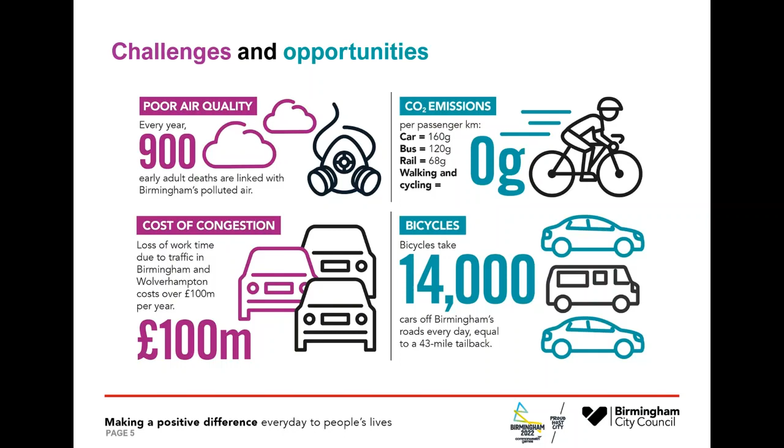And finally, the sort of cycle infrastructure that we're talking about today - there's only one stretch that isn't in this proposal - is segregated infrastructure. So it's separate from pedestrians and from general traffic, so that the cyclists have that clear space to use.

And the reason we want to do that is we know from the Bike Life reports, which is a piece of research that Sustrans do every couple of years, that 76% of West Midlands residents think that more cycle tracks along the roads, which are physically separate from traffic and pedestrians, would help them to cycle more. And 65% of West Midlands residents support building more of that kind of segregated cycle track, even if that means less room for other traffic.

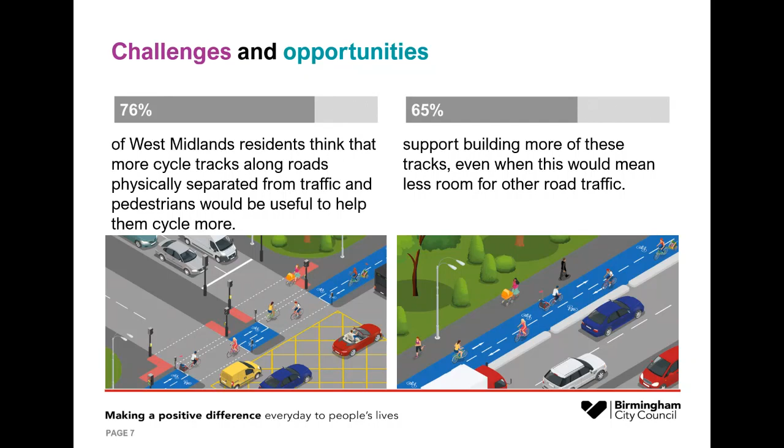So that for us was a clear message that this is the sort of infrastructure that people who are maybe cyclists but haven't quite started yet - that's what might get them to feel able to start cycling in Birmingham.

The section of route that we're consulting on in this consultation runs from the Cannon Hill Park entrance, which is the pedestrian and cycle entrance opposite Cannon Hill Road I think it's called, running down Edgbaston Road, along Park Hill, which is a fairly quiet road already, and then down Chantry Road. There's a school on the corner of Chantry Road as well there, which means we might get some good links for children to be able to cycle to school. Along Chantry Road down to the A435 in Moseley.

At the same time, we've got this spur coming off on Salisbury Road, because what we're proposing to do there is to reduce the speed of Salisbury Road to a 20 miles per hour limit, so that those cyclists who feel more comfortable sharing with general traffic have a better environment for that, because the traffic is slowed overall. That's also - we've had some looking at the statistics for accidents that happen on Salisbury Road. We think that there'll be a general road safety benefit for all road users there by reducing the speed limit.

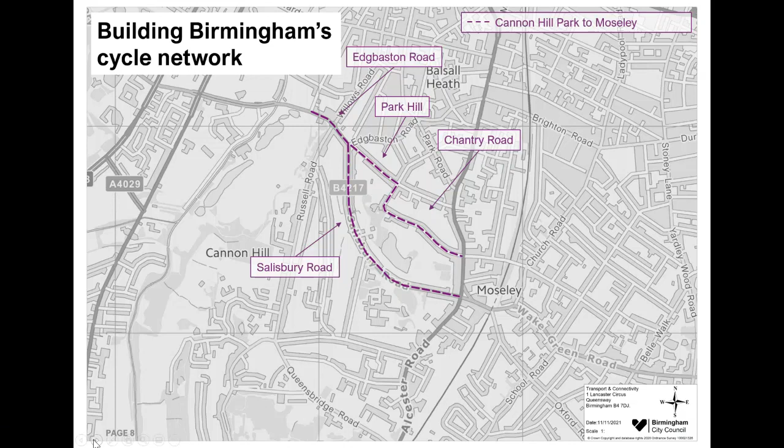At the same time, we're doing a scheme which puts in more segregated cycle route along Edgbaston Road, and that early section of Priory Road, joining the route we're talking about today up to the A38 blue route on the Bristol Road. That scheme is literally being built as we speak - construction began this week, starting with the site compound, and it's due to be completed next summer.

At the other end, we've recently concluded our consultation on the next phase of the Places for People in Kings Heath and Moseley scheme. That's about an area-wide treatment in Kings Heath and Moseley, looking to reduce the dominance of cars on residential streets, so the only cars there are ones actually visiting. Keeping the area open for walking and cycling makes it a more pleasant environment to cycle in, even without specific cycling infrastructure, just from quieter streets and fewer cars.

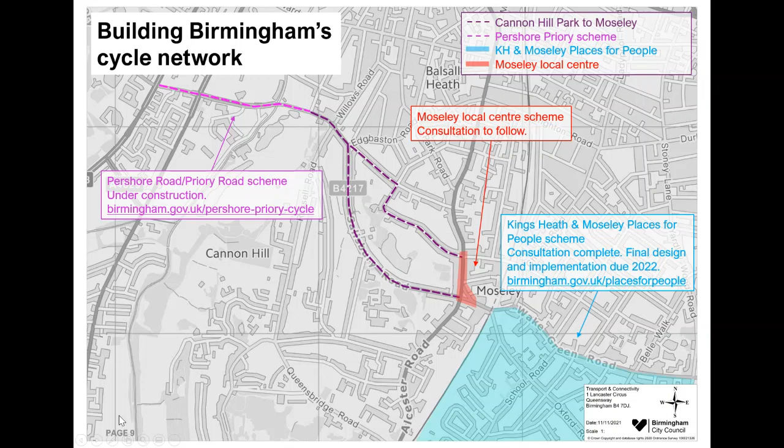That bit on Pershore Road is a bit of shared footway, but again it links in with that section. And then we have a current link through to the Rea Valley route from Moseley - that's just on 20-mile-per-hour streets, so no specific infrastructure there, but it shows how that links up.

Finally, what I'm adding in here is our walking and cycling improvement plan - our map of all the places we'd like to build cycle routes as and when we can afford it. All those dotted lines are routes we'd like to put in the future. I think I've just realised we have put in that one on Pebble Mill Road - I should have turned that solid because I think we've since built that.

But these dotted lines link us up through into Balsall Heath and continue to create the network. What I'd say is this route we're talking about tonight is a really great piece in the puzzle that fills it in and makes sense to be able to link Moseley through to that blue route on the A38.

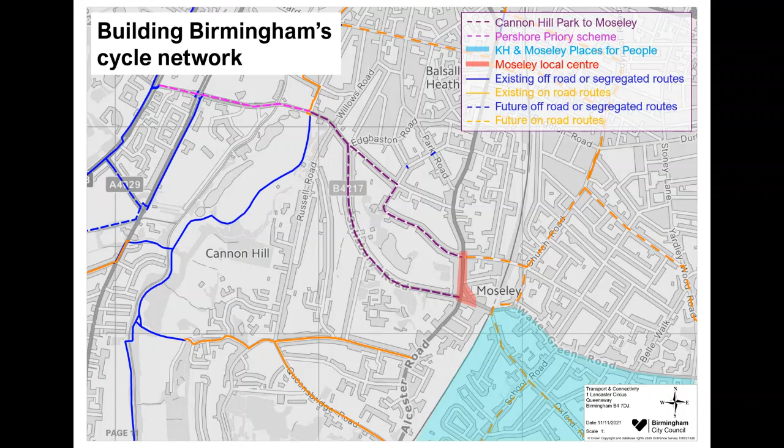Thanks, Alex. Hi all, my name's Alex Kernan and I'll be talking through the proposals, as Rebecca says. I'm just going to share my screen now so you can all see the plans. Okay, so hopefully you can all see this now on my screen.

So obviously Rebecca's talked through the plans that tie into our scheme. I'm going to start at the end of the route where we connect onto the Pershore Road scheme, which is currently being constructed on site and, as Rebecca said, started this week, so we should start seeing some movement on this. It'd be nice to tie into the route to create a clear link between Priory Road all the way through to Moseley, providing better connectivity into the city.

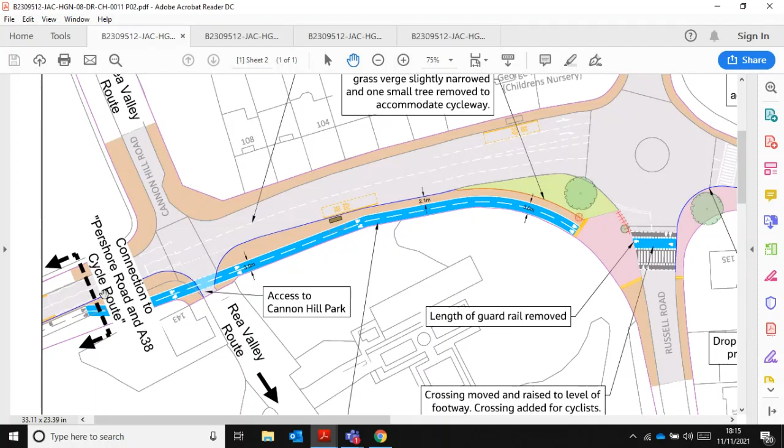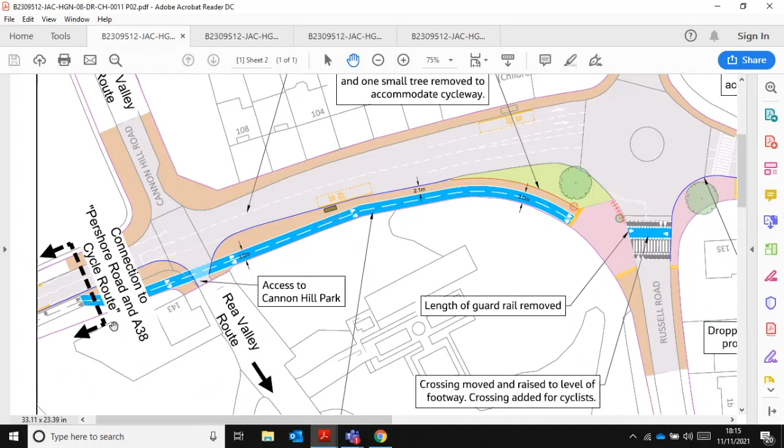Looking at the plans here, what we're planning to do is propose a segregated route almost all the way from Priory Road, the Edgbaston Road, all the way towards Moseley. It's shown in blue at the moment, but that's just for indicative purposes, so you can clearly see where the cycle track's being proposed.

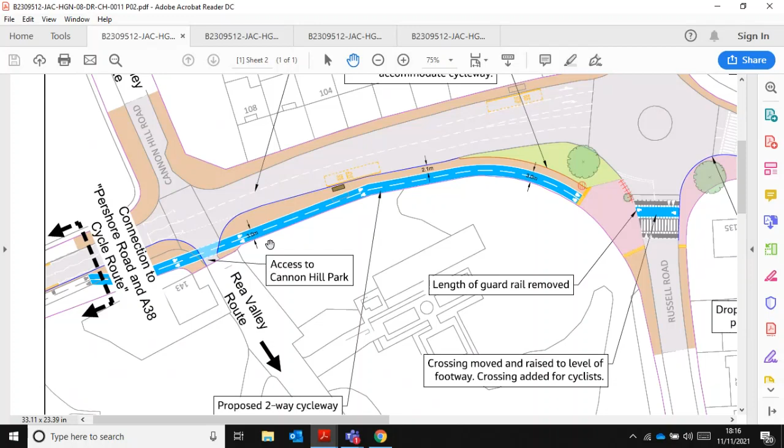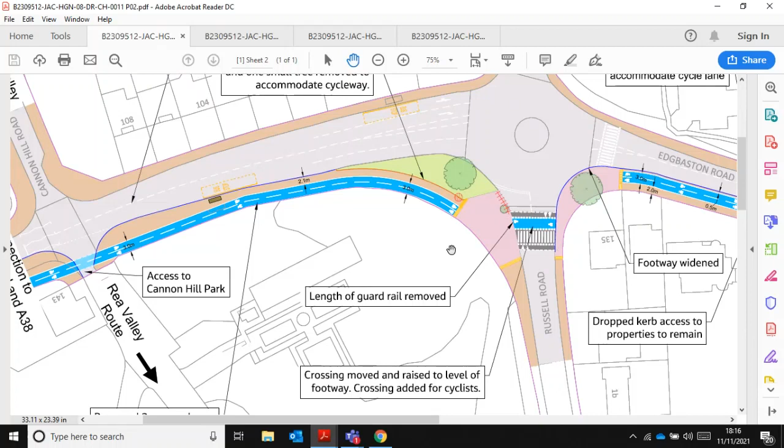We're only planning to do blue where we've got points of interest where vehicles will need to be more aware that there's cycling facilities across junctions and crossings, just to highlight an additional hazard or crossing point, just so it makes it clear for vehicles.

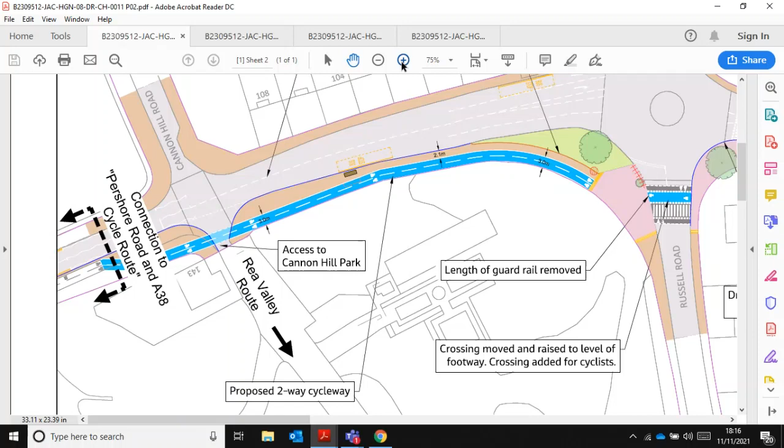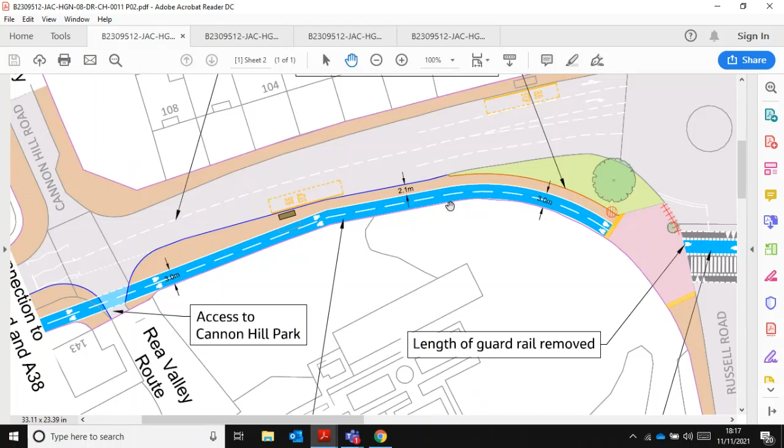So just starting at the end here, as you can see, our cycle route is proposing to tie in with the end of the Pershore Road route with the segregated two-way cycle track, which crosses over from the park, the Cannon Hill Park access. This will be at pavement level, so level with the footway. We are planning to build out the kerb line slightly just to accommodate the cycle route and also pedestrian facilities in the area, so you've still got footway space.

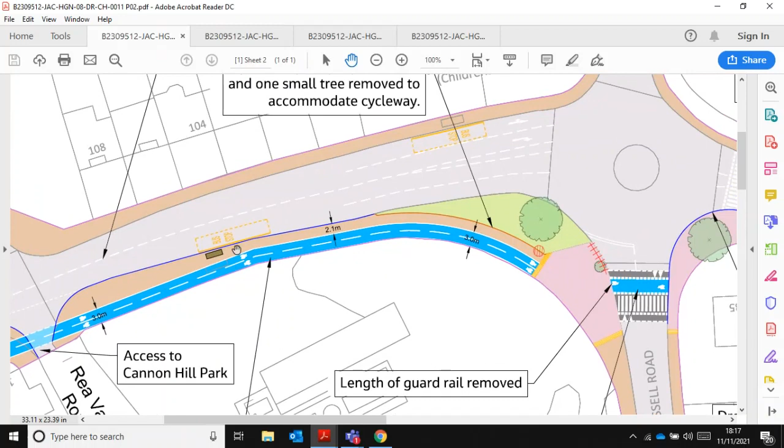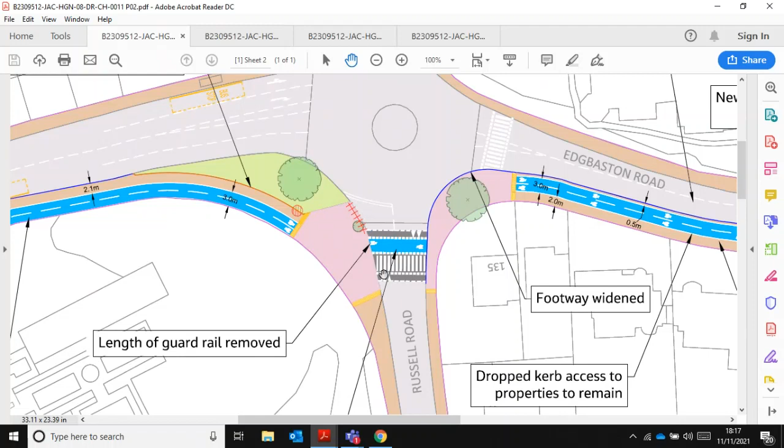We've kept the bus stop away from the cycle route completely at this point, so there will still be room for passengers to queue and alight on the bus stop. So just moving round, we've got a continuous stretch of the segregated cycle route. We then come into an area of shared use where pedestrians and cyclists can use this area here, just because it's particularly wider and there's a lot of visibility around here.

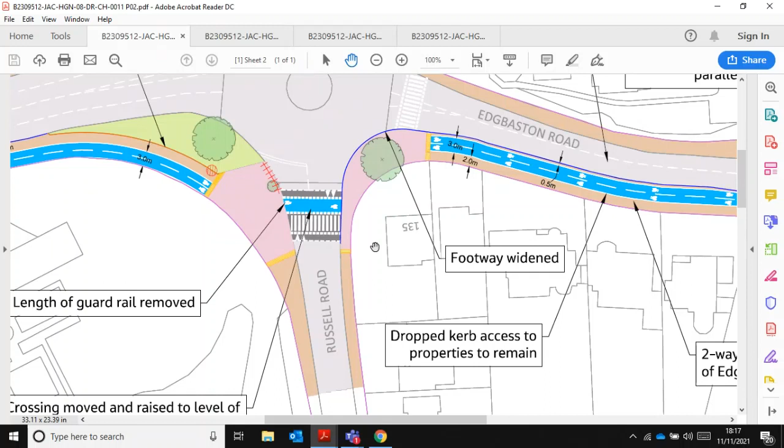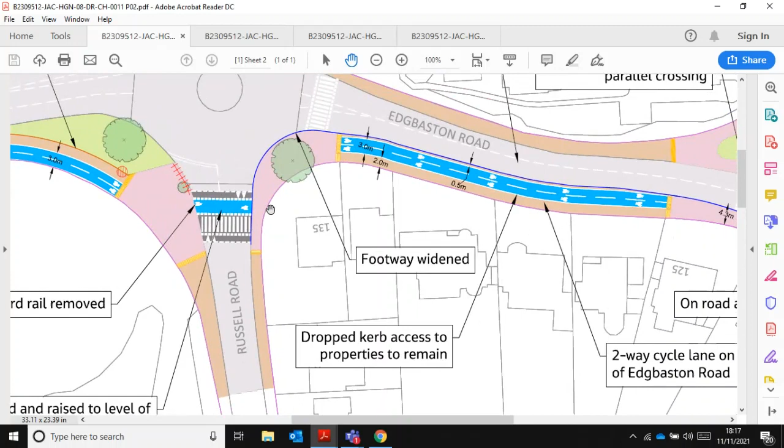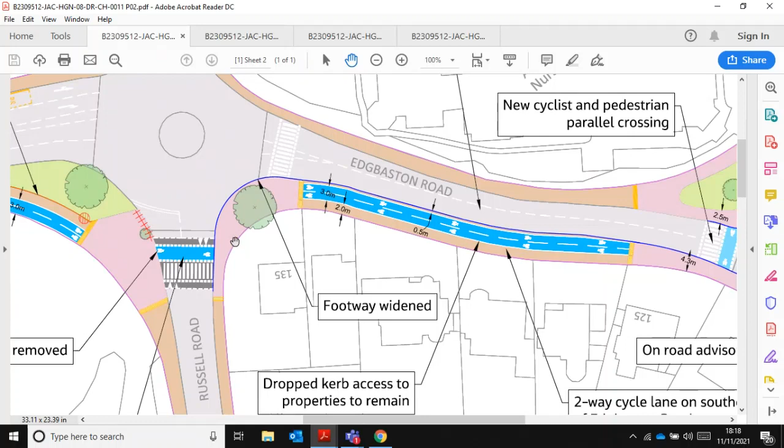We've then got a tiger crossing proposed across Russell Road for cyclists and pedestrians, so they will be able to cross the road here and have priority. We're then proposing to extend out the footway again on this corner, just to create a little bit of extra space here for pedestrians and cyclists again, so that just gives a little bit more room and visibility for everybody.

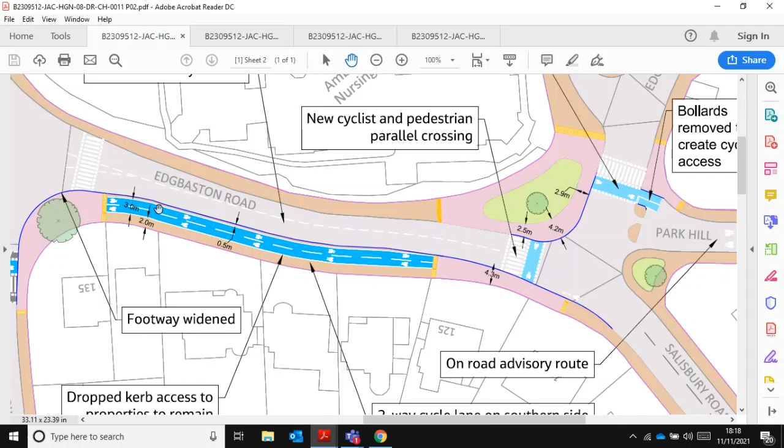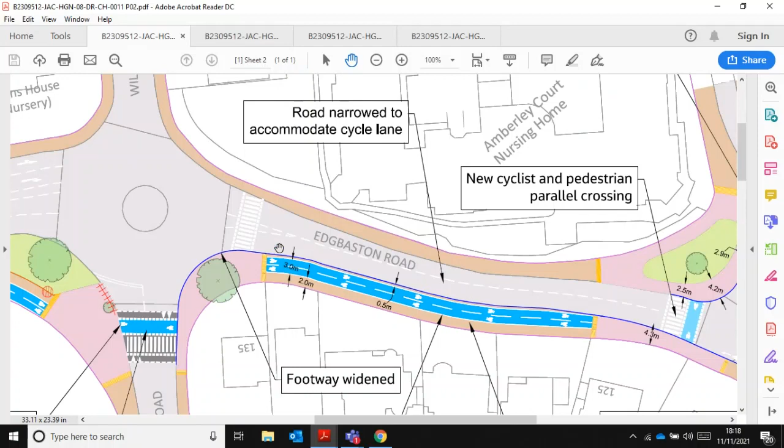So continuing on Edgbaston Road, at this point we then come into another area of segregated cycle route in both directions, and there will still be the permitted footway space as it is currently. What we will do is we will narrow down the road at this point, just because we need that extra bit of space for the cycle track. So this stretch of road will actually just be for cars going in one direction, so we won't have two lanes as we approach the roundabout at the top here, as it is currently, because we're building out the footway along this section.

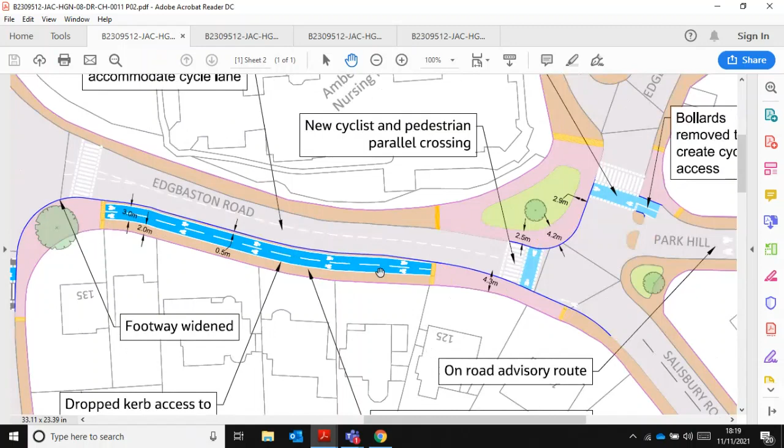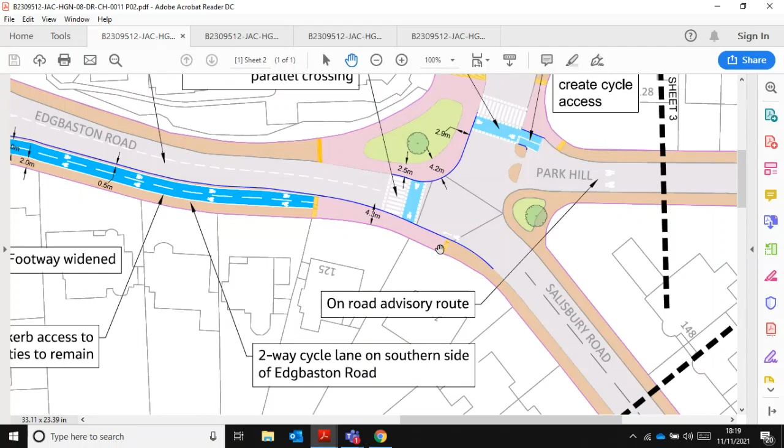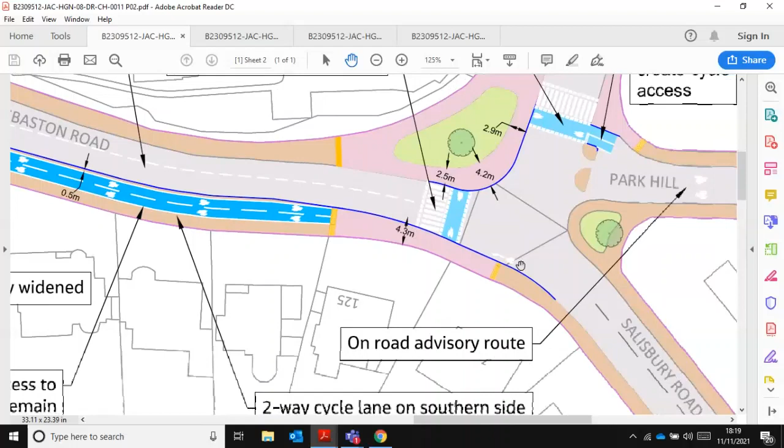At the end of this section, we then come into another shared area where we've got pedestrians and cyclists, just for a short section. If you are a cyclist that uses Salisbury Road, there is a provision where you can actually rejoin the footway where it's shared space, so you can access and egress from the cycle route.

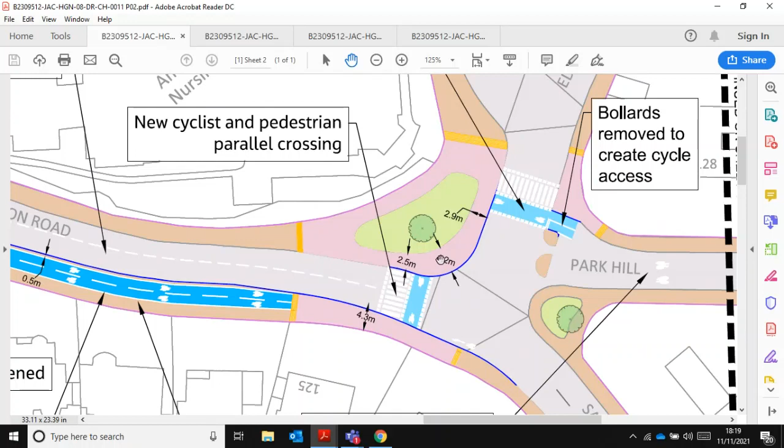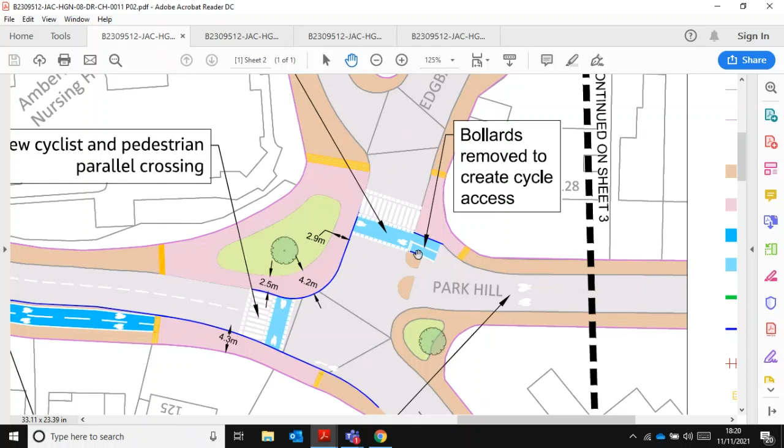We've then got another tiger crossing just to get cyclists across to the opposite side, a little bit of footway extension for some shared use along here, and then another tiger crossing to get cyclists onto Park Hill for the advisory route. So obviously there's an existing modal filter, so bollards and a kerbed build out here. What we would be proposing to do is just make some adjustments to the existing build outs there, so that cyclists can easily access and egress along Park Hill. So that's that part of the plan.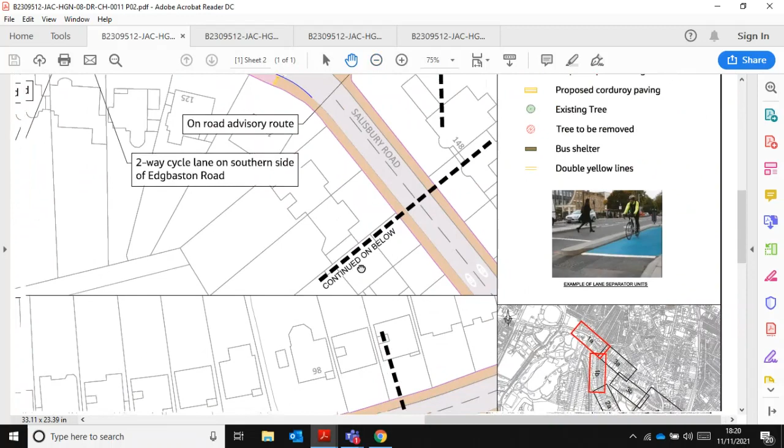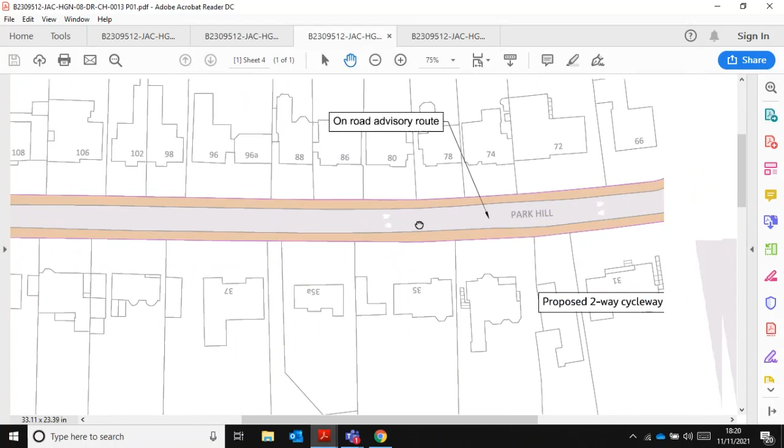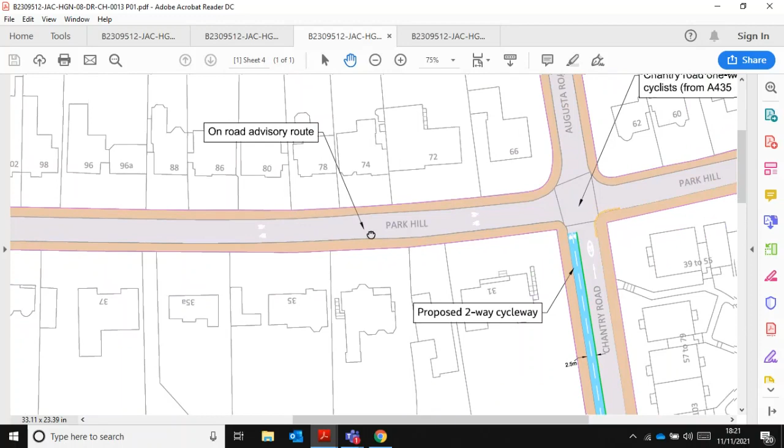Just scroll down. I'm showing Salisbury. So I'll just continue on the Park Hill section. So going back onto Park Hill, we are continuing the advisory cycle route along Park Hill. So that will just be on the carriageway or road level. There won't be any segregation here, just because it's quite a quiet road through this section, so we feel that that's adequate along this section.

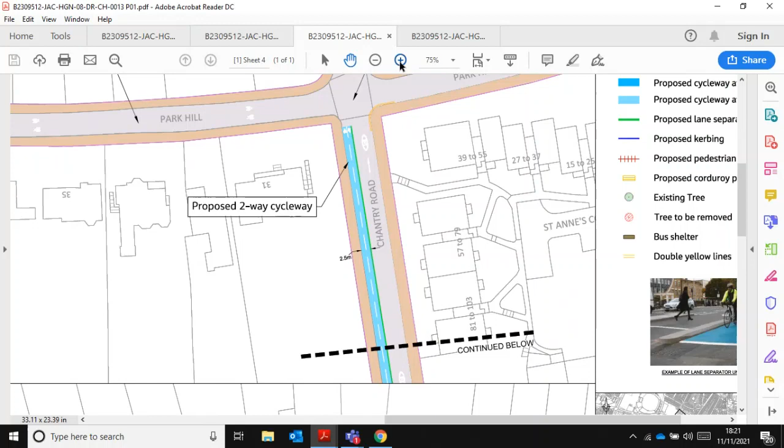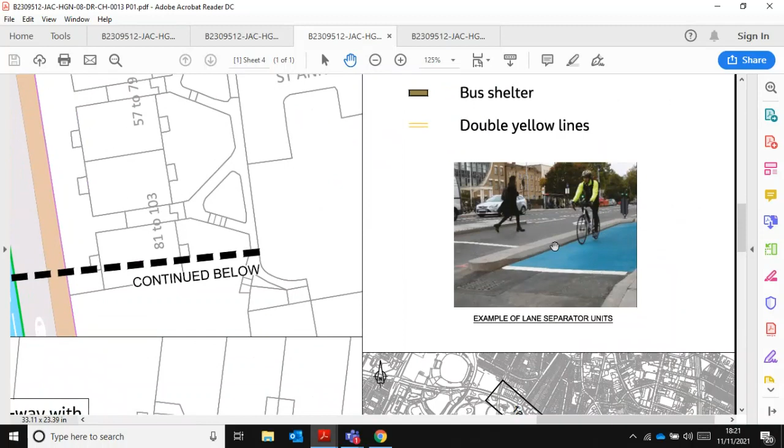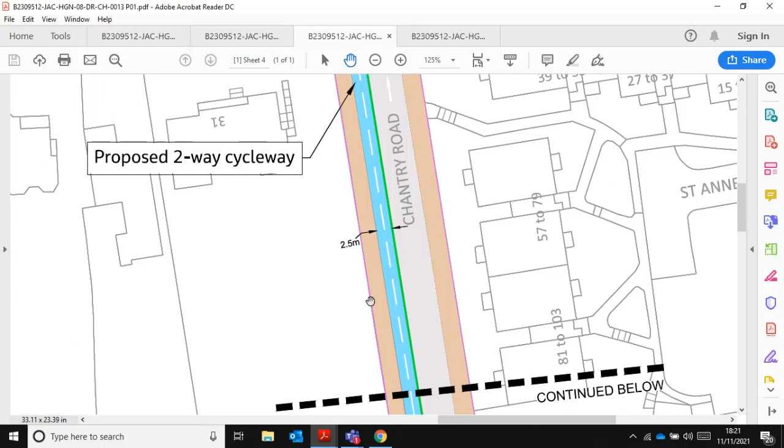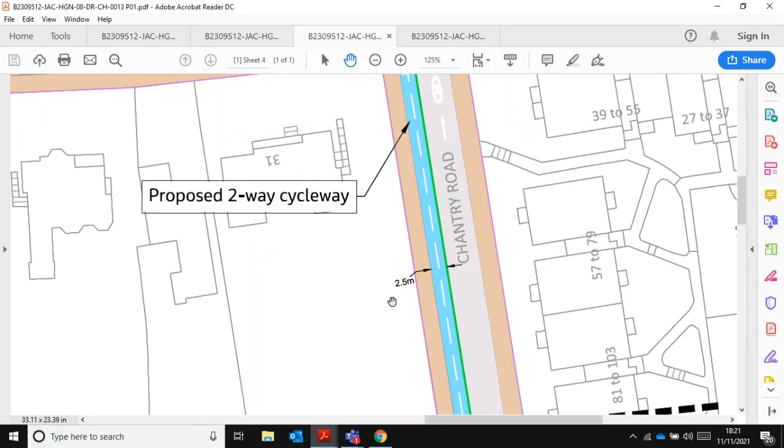We then come towards the junction of Chantry Road, where we're planning to introduce a segregated cycle lane in both directions, and that's separated by a solid curb, which I will show you an example of here. So as you can see, just a little photo there of the solid curb. So that's going to be along the length of Chantry Road. The thing to bear in mind here is that obviously there are accesses to properties along this route, which will be accommodated, so there will be gaps in the curbs to allow residents to access and egress their properties, so that will not be an issue.

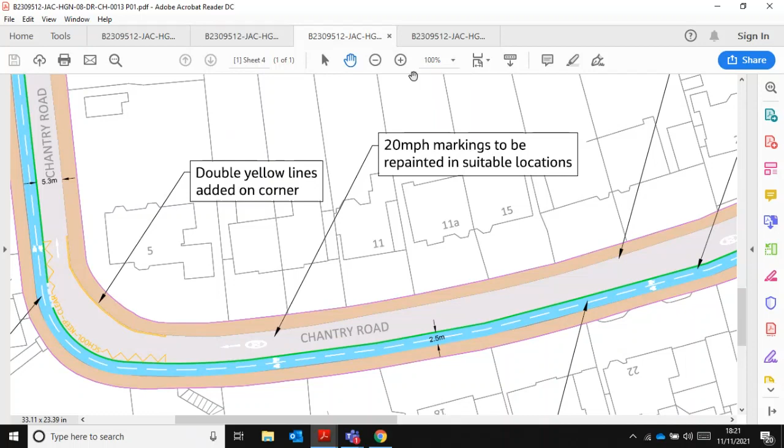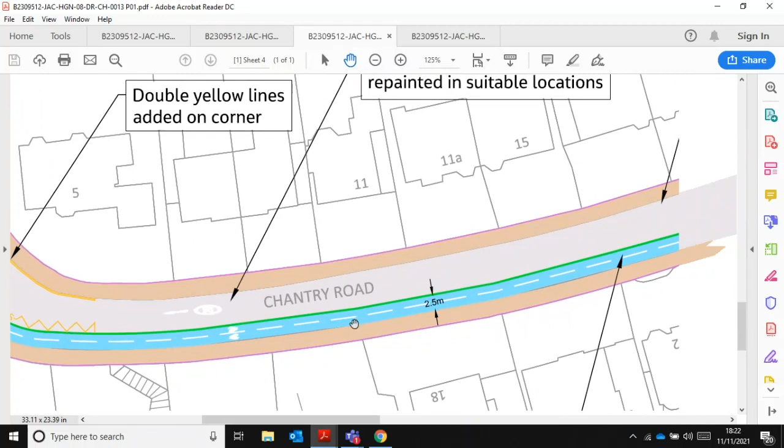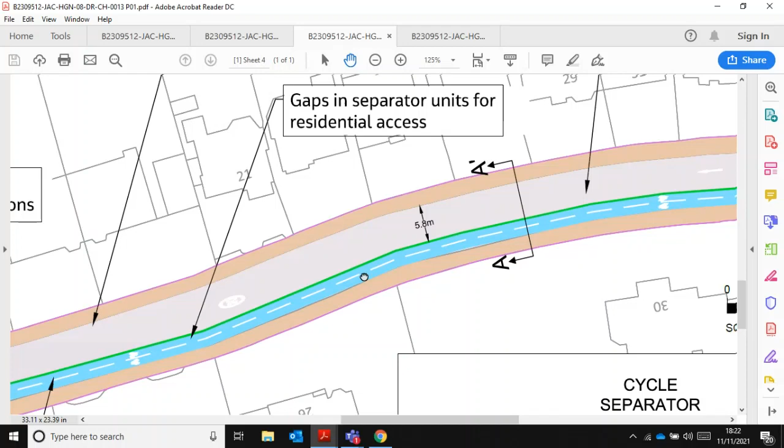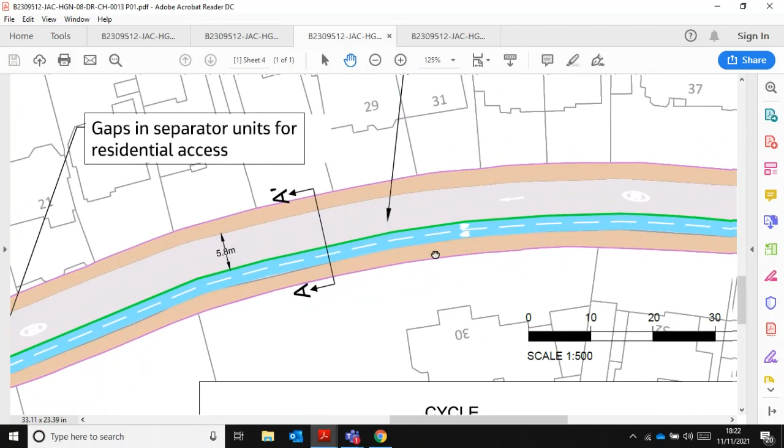So Chantry Road as a whole will become one way as opposed to a two-way route, as shown on the image below. And obviously there's a segregated bidirectional or two-way cycle track the whole way through. Again, as I say, it was shown in blue, but this is just for illustrative purposes only. So the route will just be white lined and segregated with a curb, as I say, with gaps to allow accesses. And that follows the whole route down all the way into Moseley High Street.

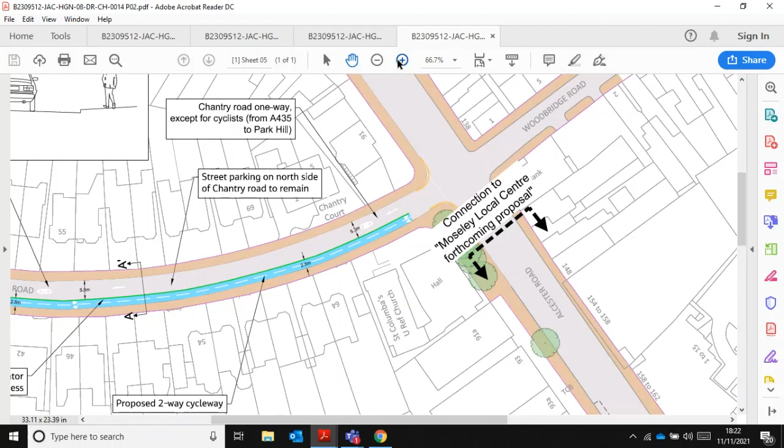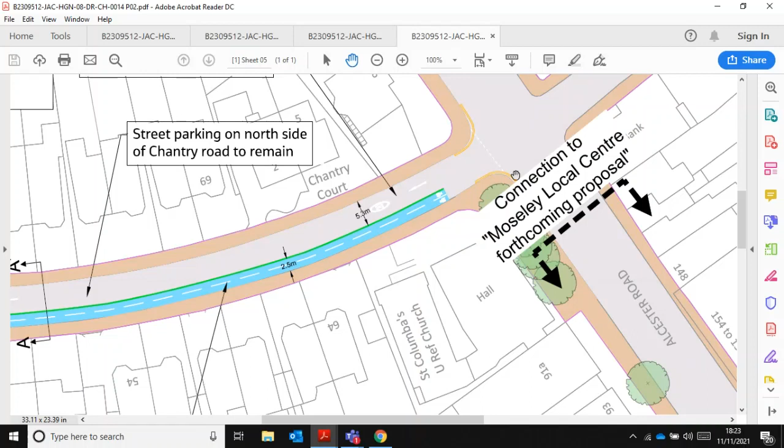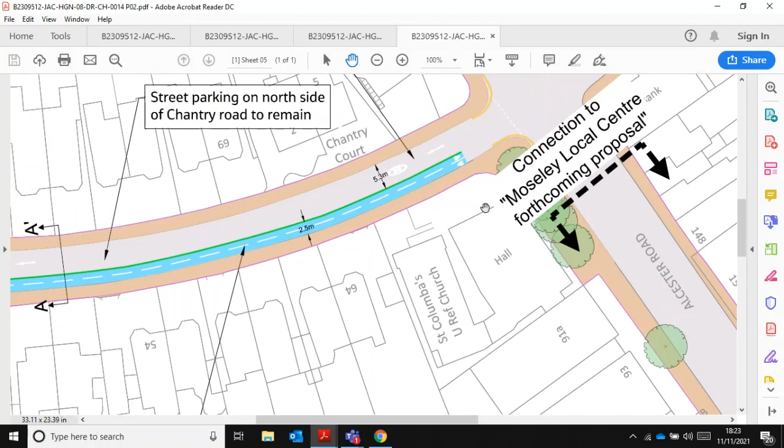So it ties in just at the end at the junction of Alcester Road here. So the proposal on this corner here, where the two-way cycle track ends and you can access Moseley, will be picked up as part of the Moseley Local Centre Plan. At the moment, we're looking at allowing cyclists to access an area of shared use at the very end of Chantry Road, and then there would possibly be a cycle route on one of the sides of the road, but we're still in discussion on the details of that proposal, but it will be coming forward for a consultation soon.

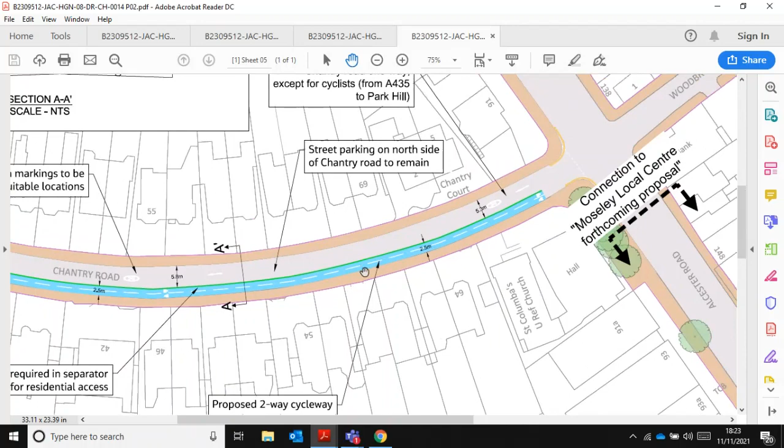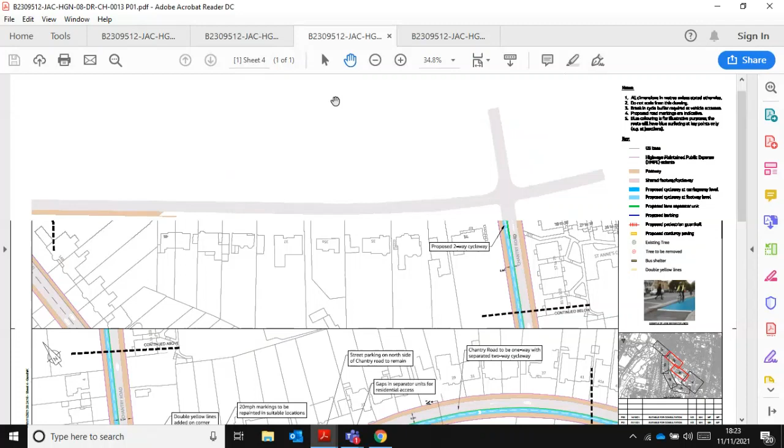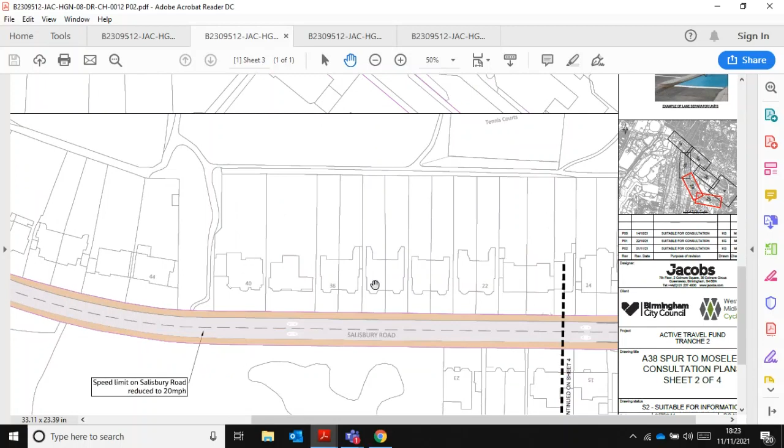Okay, and then just looking at Salisbury Road. Sorry, just flipping back on the plans. There we go. So Salisbury Road, we've proposed a 20-mile-an-hour speed limit on Salisbury Road, all the way along, all the way up to Edgbaston Park Road. So that will become a 20-mile-an-hour route, just because it makes it a little bit safer for cyclists, and it makes it a bit more comfortable for cycling along that route, and it just provides another element of connectivity into the Pershore Road scheme, and that is the plan.

Thank you. Pass you on to Rebecca. Yeah, I should just flip back to my screen share.

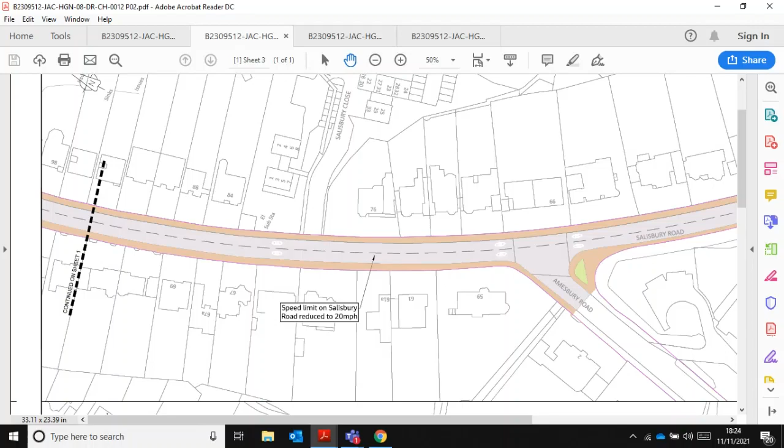We've also got a drop-in event, which I have not updated the information for. I apologise. The drop-in event is next Wednesday at Moseley Exchange, between 4 and 7. That's the drop-in session details for the A45 session. I will update that shortly.

At the same time, we are consulting on some other cycle routes, which we have funding for through the Active Travel Fund. These are 3 cycle routes where we put in pop-up infrastructure during COVID, and we're now looking to make the infrastructure permanent and improve it as we go along. That's 3 sections of route. The section on Bradford Street in the city centre. Directly linked to that, there's a route out from Bradford Street to Small Heath Park. We're calling it the A45 corridor because it basically runs parallel to the A45 but not on the A45.

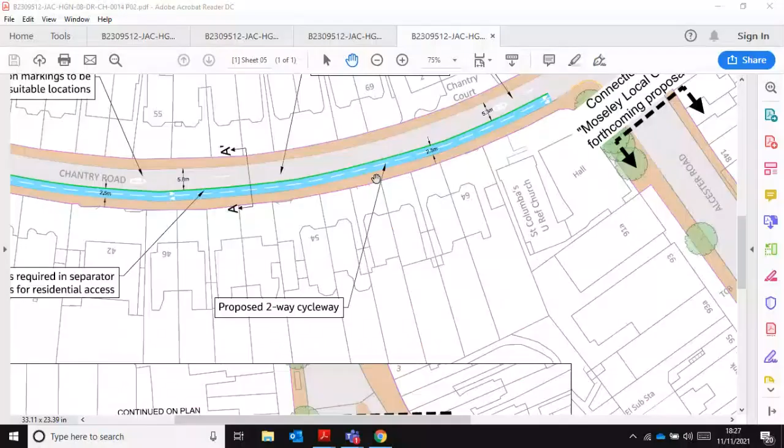Okay, so the first question we had was, why should there be a segregated cycle lane on a road with almost no traffic on it? Okay, so obviously we're proposing the Chantry Road route because it's a nice connection from Moseley High Street into the new Pershore Road scheme. So I'll just share my screen again. And obviously it does get quite busy around peak times as well, so it's just a nice alternative for people who are using the school to pick up their children. So it gives another active travel link to pick your children up.

It also provides a nice connective route to the city centre for work or for social events and things like that. So we've picked that route because it feels safer as well for cyclists who are not as experienced to use Chantry Road as an alternative. So that's really why we picked this route. The next question is, why will drivers keep to 20 miles per hour on a fast road like Salisbury Road?

So we're hoping that drivers will adhere to the 20-mile-an-hour route. They should be adhering to the speed limit because that will be part of the traffic regulation order, and obviously they should be adhering to the highway code, and if it's shown as a 20, they should really be sticking to it.

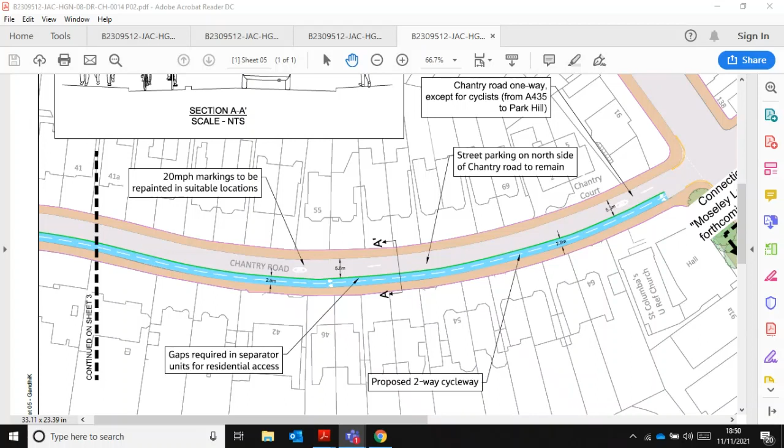We've had one more new question, and that's, will you be traffic calming with the one-way system? On Chantry Road, is that presumably? I think so, yeah. It hasn't specified a road, but it's not on the proposal, no. So it would just be the straightforward one-way system. Obviously there'll be a cycle track as well in the road or carriageway, so that should be a self-enforcing traffic calming measure. The next question is, will the cycle lane be swept of leaves? Yes, it will. That will form part of our maintenance.

Okay, so one question hasn't been answered, and that was the question asking why Salisbury Road was rejected as a dedicated lane. So that's why we didn't put the segregated lane on Salisbury Road and put it on Chantry Road, I think. Yeah, I think we did answer that right at the start, but have a recap from Alex. Yeah, so the reason why we chose Chantry Road rather than Salisbury Road is that it is a quieter road. It's more comfortable for those who are starting out with their cycling commutes, etc. And it's just a nicer route through there in terms of traffic.